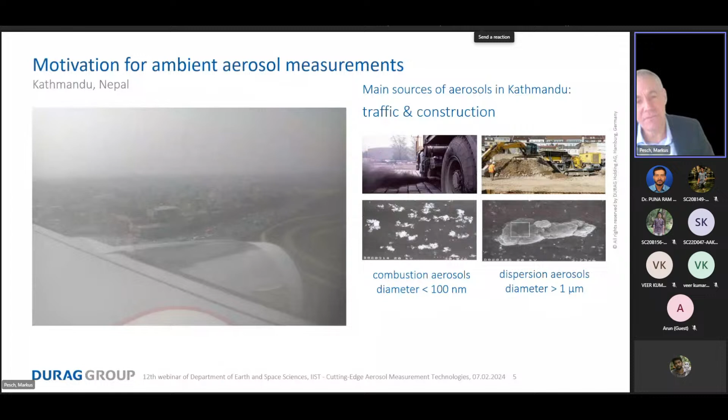On the next slide, you see Kathmandu, Nepal. That was also a flight close to the airport, and you see the sky is very similar to the sky of Beijing, but here the reason for aerosols was traffic and construction. And the interesting point when we are talking about airborne particles, aerosols, the size and the number of the aerosols gives really important information about the sources of the aerosols.

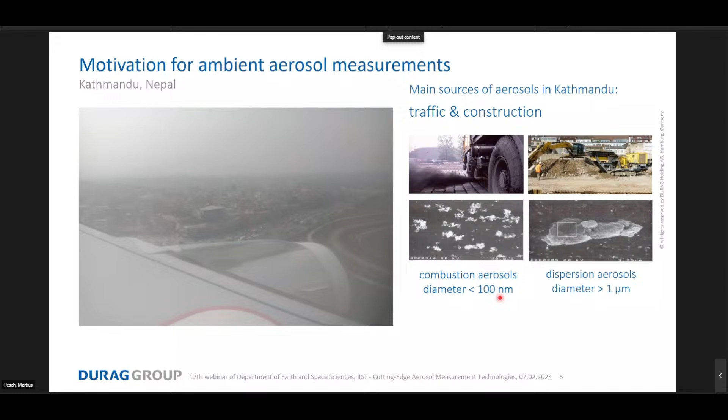If we have combustion aerosols, for example from a diesel engine, you have very, very small primary particles. They agglomerate to some clusters, and you see the diameter is less than 100 nanometers. Nanometers are 10⁻⁹ meters, so very small. The size of your hair, for example, is 80 micrometers. So nanometers are a very small metric. You see the combustion aerosols are very small.

Then you have construction. Here on the right picture, you see construction. Construction aerosols are mechanically produced aerosols. These aerosols are most often much larger. You see here a typical picture of a dispersion aerosol, and here you see the diameter is a couple of decades higher than the combustion aerosols. So the aerosol size and the aerosol number give you important information about the source, about the reason of the high pollution level.

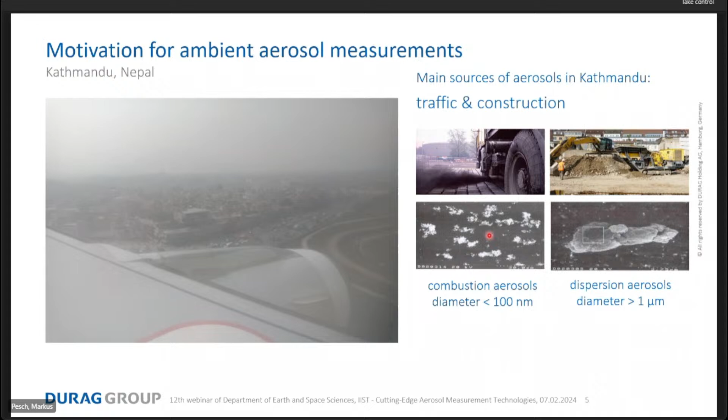When you compare, for example, the 800 micrograms per cubic meter in Beijing, and I know that in India there are many cities with similar concentrations, you see what is really the recommendation of the World Health Organization. The recommendation of the World Health Organization for an annual value for PM10 is 15. For a daily value, 45. Why are these values so small? Because there's not a limit or a value where you can say particles are not harmful anymore. So we have to reduce the particles, the aerosols in the atmosphere, to a minimum.

And I know that even the global background of aerosols is today higher than, for example, 5 micrograms for PM2.5. But of course, the World Health Organization publishes values that should be the goal, the objective for all clean air strategies. So motivation for aerosol measurements: we need precise aerosol measurements in the environment. We have to look, of course, for limit value exceedances, but we want also to identify the high levels.

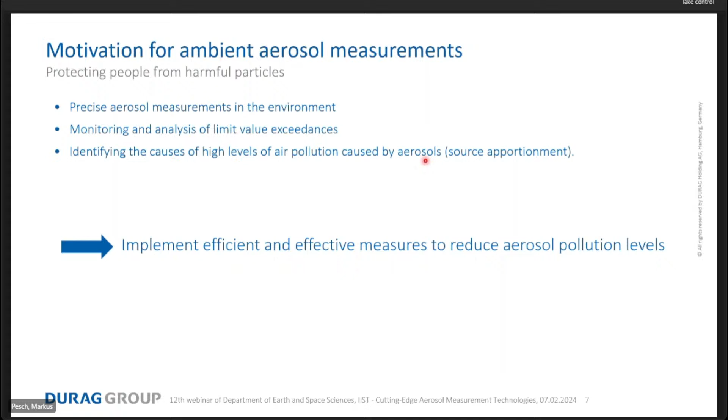Let us assume you have a clean air strategy for Delhi. In that clean air strategy, you have, of course, first to identify the main contributors to the pollution. Is it the traffic? Is it construction? Is it maybe also yellow sand? Or is it a natural aerosol? So to find efficient and effective measures, we have to determine the aerosols very, very precisely.

Yellow sand we would measure in that size range between 2 and 5 micrometers. In that size range, we call it the accumulation mode. Many small particles agglomerate, coagulate, and then we have larger diameters that are determining the mass. So the question is, okay, we want to reduce the pollution level. All limit values today are mass-based, micrograms per cubic meter. But meanwhile, we have more and more activities to measure also the number of aerosols, the size of aerosols.

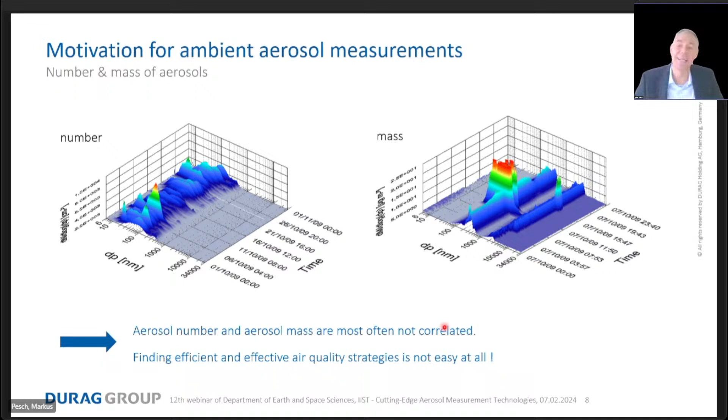And the World Health Organization recommended for the first time in 2021 also to measure, to count the ultrafine particles. Therefore, I want also to present in my talk today cutting-edge instruments to measure really small ultrafine particles. Aerosol measurement technologies. Before I start to give you an overview about aerosol measurement technologies, I want to clarify some aerosol definitions.

So aerosols means solid and liquid particles, not water. We do not want to measure water. That's very important because I can tell you water is one of the key factors that make aerosol measurements outside so difficult. You can assume if you have a foggy day, and what is really fog? What are the water droplets? And what is the solid or liquid particle, the aerosol? So foggy days are the most difficult days to determine aerosol concentration.

So water is always an issue. We do not want to measure water, and therefore we have very, very tricky drying systems to dry the aerosols before we are measuring them. And to that point, I come later. And instead of aerosol, most often the term particle is used. So we use both, even at GRIMM. Our name is GRIMM Aerosol Technology. We are a member of the Durag group, but many people say instead of aerosols, also particles.

Particulate matter is the English word for aerosols in the atmosphere, and that includes all particles. And I can tell you, when I studied environmental engineering in the mid-80s in Berlin, we were only talking about TSP. TSP means all particles, all suspended particles, droplets, liquids, in the size range from 1 nanometer, so the very, very small cluster particles formed most often from SO2 oxidized with hydroxyl radicals. I come to that later. So the very small particles are in the range of a nanometer. The very big particles, the big players, are in the range of 100 micrometer.

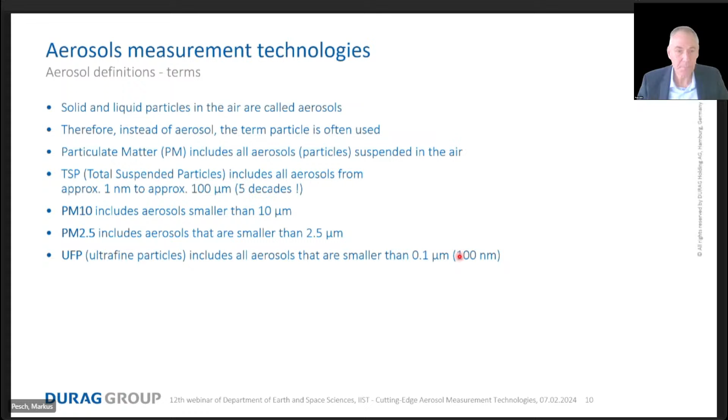And in that talk, I want to show you cutting-edge instruments to measure PM10 and PM2.5, but also instruments that are capable to measure the very small, the ultrafine particles. And the very challenging point when we are talking about aerosols, we have different sources. We have biological sources such as pollen, we have sand flow, yellow sand, a big issue from China, for example, and that sand is transported over long distances. We have volcanic eruptions where we have huge amounts of ash, but also of combustion aerosols to very high altitudes.

We have agriculture. Agriculture is very interesting because you have directly emitted aerosols. We call those aerosols primary aerosols. But as you may know, agriculture is a big source for ammonia, for gases, precursors of aerosols. And this ammonia, NH3, will be converted in the atmosphere to aerosols.

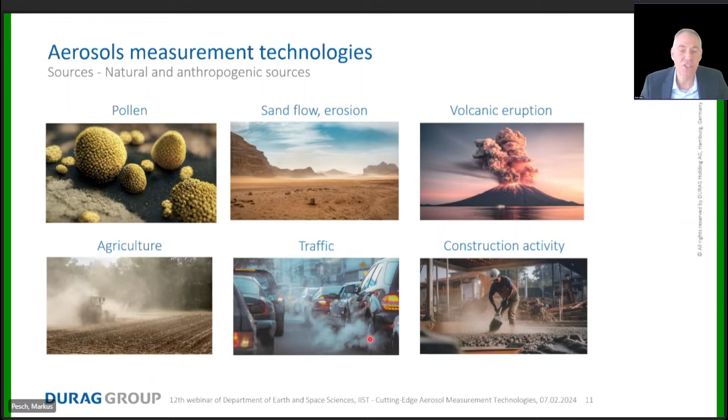Then we have traffic and we have construction. Construction, you learned, larger particles because it's a mechanical process. Traffic, combustion, condensation aerosols, very small. So we have different sources, and when I go further, we have also different sizes and colors.

An SO2 molecule, an ozone molecule, an ammonia molecule is always the same. But aerosols are totally different in color, in size, in shape. And that is the challenge for our measurement technology. We want to measure pollen, we want to measure ammonium sulfate, we want to measure mineral dust, we want to measure different aerosols, and the instruments should inform us about the mass, PM10, PM2.5, but also about the number, ultrafine particles, for example.

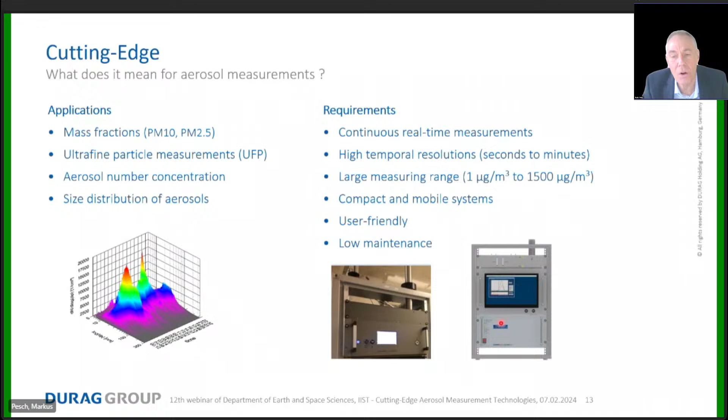So we are here talking about instruments in the range between, let us say, 15,000 and 25,000 euro. When we are measuring ultrafine particles, we go very quickly into the range of 40, 50 thousand, even higher prices. So the smaller the particles, the more complex the instrument, and most often the more expensive.

What does it mean, cutting-edge aerosol technologies? So cutting-edge aerosol technologies are based on light. We are measuring light. I was general manager of a LiDAR company, so we were developing LiDAR, light detection and ranging systems. And I can tell you, you can measure a single photon from the troposphere with a big telescope. So you can measure very sensitively. You can really measure single photons.

And what is a big advantage when we are measuring aerosols with light? We do not contact them. We do not change them. We have not any effect on the aerosol. And that is especially for aerosols very important, that you do not touch it, that you do not change the size, that you avoid agglomeration, diffusion losses, impaction losses, sedimentation losses. So light is very fast and sensitive.

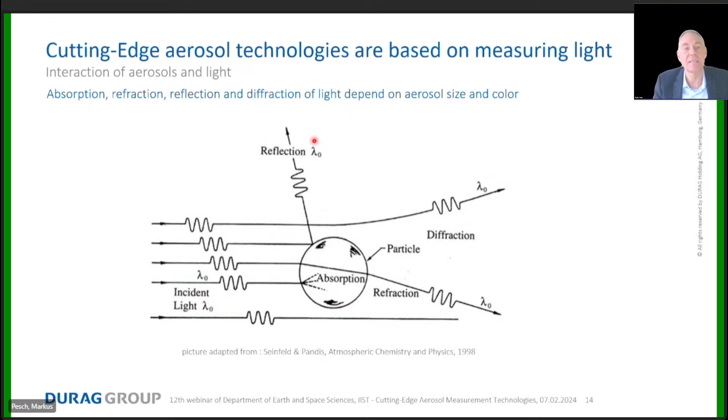You have, of course, different possibilities when you have light on an aerosol. What we are measuring is the scattered light, the reflection, the elastic scattering, where the wavelength is not changed. So the incident light and the reflected light have the same wavelengths. And the larger the particle, the stronger is the scattered light. That is the base of a cutting-edge aerosol technology.

When I talk about cutting-edge aerosol measurement technologies, I want to show you that we have, for all aerosols in the atmosphere, different types of measurement devices. The smallest aerosols are formed from SO2, OH radicals, ammonia, gases, precursors. They build very small clusters in the range of 1 nanometer. Here we have the so-called PSMPS. Then we have nucleation aerosols in the range between 10 and 100 nanometers. We can measure it with an SMPS plus CPC. And these two devices I will show you later.

And then we have coarse aerosols. In that range, we can measure with the optical aerosol spectrometer. And I will show you the latest development of my company, the EDM280, Environmental Dust Monitor 280, in that presentation.

Very important is you should never mix indoor instruments, this portable device, 11D, here's a sampling pipe, with outdoor measurement devices. An outdoor measurement device you can also use indoor, no problem. But when you go with an indoor instrument outside, you have strong influences of humidity. Most often you have a water surface on the aerosol. I explained that we do not want to measure water, so you should never use an indoor instrument for outdoor. For outdoor instruments, we have instruments where we are drying the sample before we are measuring it.

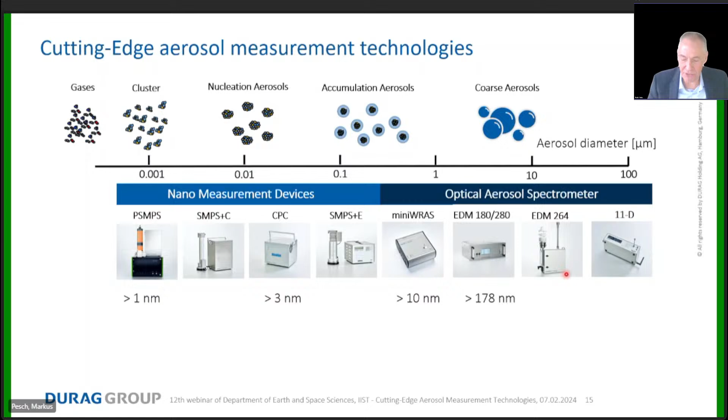When we are talking about aerosol spectrometers, we have different principles. There's an ISO guideline where you can look for more details. We have the optical focusing, where we hit with a laser, with a light, into the aerosol flow. And then you have a certain part of the aerosol flow that you analyze. The advantage is you can adapt the volume depending on the aerosol concentration. The disadvantage is when you have only a small part of the full flow, you may have boundary effects where you do not really catch all particles in the correct size.

The other possibility, and that is used by Grimm, by my company, is aerodynamic focusing. We accelerate the aerosols with an orifice, and then we have a laser passing through the accelerated aerosols, and we measure all aerosols coming through that laser beam. We call that full flow analysis, and the big advantage is you measure each single particle, and therefore you can distinguish 0.1 microgram per cubic meter from 0. So the detection limit is outstanding.

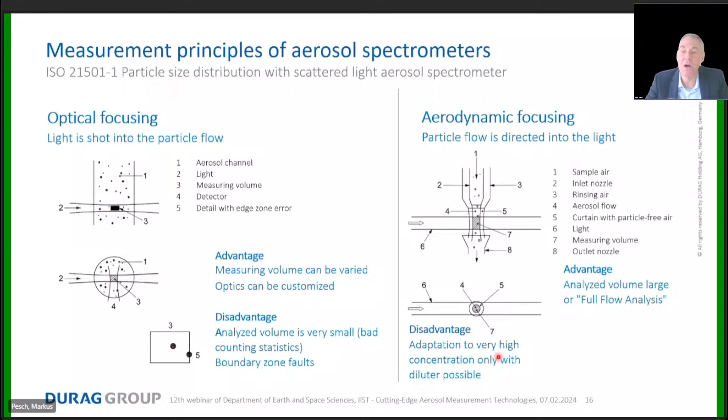The disadvantage could be that you cannot adapt it to higher concentrations. You would need a diluter, but our instruments are capable, as I mentioned, of measuring very low concentrations up to milligrams per cubic meter. So in the atmosphere, you do not have any problems. You do not have to dilute. You can measure with the aerosol spectrometer all sizes and concentrations.

Now I come to the latest development of my company. It's the EDM280. EDM means Environmental Dust Monitor. It's the latest development, and you see here we measure PM10, PM4, PM2.5, PM1, TSP, total suspended particulates, in 32 size channels.

And we start from 178 nanometer to 29.4 micrometer. So we cover a broad range of aerosols. Of course, the main interest of the EDM280 is measuring PM10 and PM2.5. Why? Because they are limit values. The precursors, the 180, we have sold roughly 3,000 instruments worldwide. They are running all over the world. The EDM280 is the latest development.

And what is very important when you're measuring aerosols, you have to suck them in very precisely. Then you dry the aerosols, most often by heating. So the EDM280 uses a heating concept to dry the aerosols, to evaporate the water, and then the aerosols are directly straight ahead here in the optical cell of the instrument. Of course, all ambient measurement technologies are equipped with a meteo sensor, wind speed, wind field, meteo data as temperature, pressure, to combine it with the aerosol measurements.

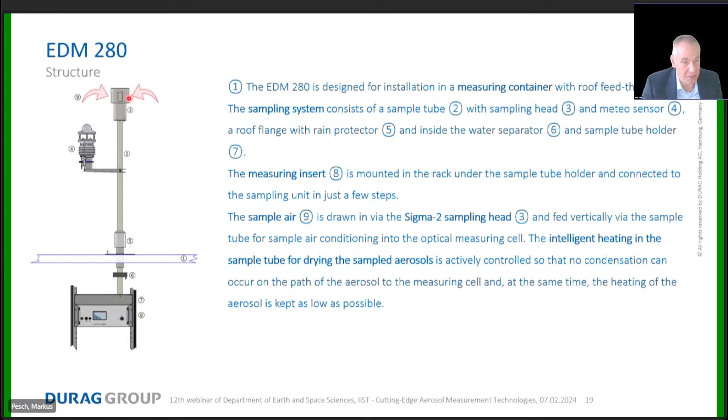Why using such a sigma-2 head? Yeah, this sigma-2 head has the capability that even if there's a high wind speed, the constant wind speed is reduced to a minimum here because of the geometry, and then we suck the aerosols representatively into the instrument with only 1.2 liter a minute.

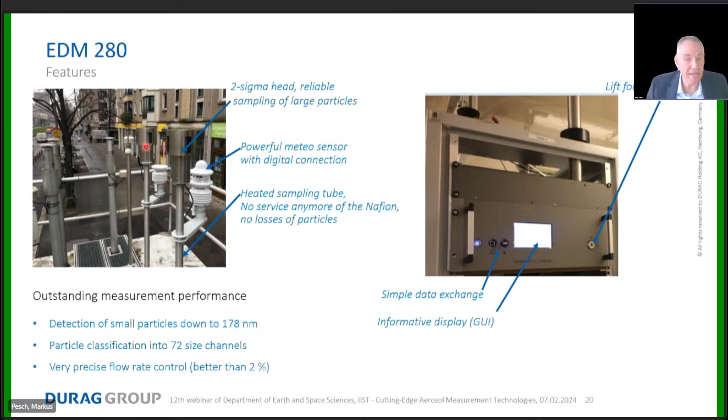And now all aerosol measurement devices are only as good as the analytical engine, let us say. The analytical engine of an aerosol spectrometer is, of course, the optical cell. So the optical cell is the motor, is the engine of every device. And in that cell, we spent more than 30 years of development. It looks easy, but it is not easy, I can tell you.

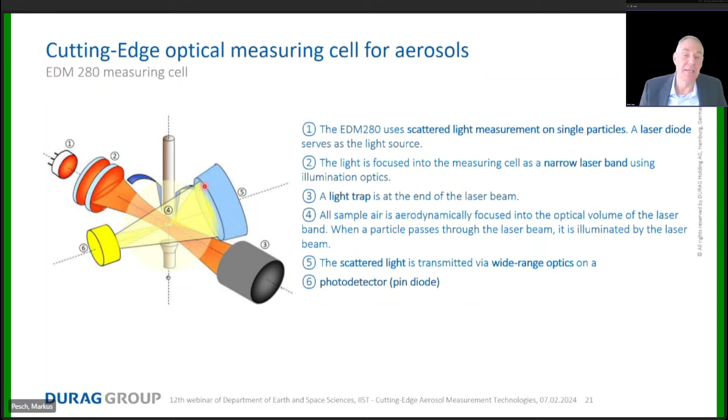So this optical cell measures in real time, in 1 second, all aerosols. It's a full flow analysis coming through that laser curtain. What you also see here is the so-called rinsing air. This rinsing air avoids contamination of the optics with dust. You can imagine when you are measuring aerosols, the main issue could be that the optical cell can be contaminated, so you often have to clean it, and therefore we are using a rinsing air for continuous cleaning of the optics.

Ultrafine particles. Ultrafine particles are so small that you cannot measure them directly. You have to use a physical behavior of particles, and that you can see on a clear sky when you have a jet flying and there's a huge water concentration in the atmosphere. You see the condensation stripes. And that is the same effect we are using to measure UFP, ultrafine particles. We call it a condensation particle counter.

So we condense a vapor around the particles, and then the particles grow, and then we can measure the particles optically. So the aerosol with the small particles goes through that wick, and that wick is heated to 36 degrees. We have butanol. Butanol is a very nice reagent to condense on aerosols. Then the aerosols with the saturated butanol vapor go into the condenser. Here it is cooled from 36 to 10 degrees. And then the particle is like a coin growing around the condensed butanol.

And from the very small particles, you have huge droplets, and then you can count them with the laser beam, as I explained, with the same optics. We call it a condensation particle counter. There's meanwhile a European standard, a CEN, that is well defining what is really the counting efficiency behavior. There are also devices on the market that are working with water. The advantage when we are using butanol, an alcohol, is that all aerosols, independent of the chemical composition, are growing and captured here with a laser beam.

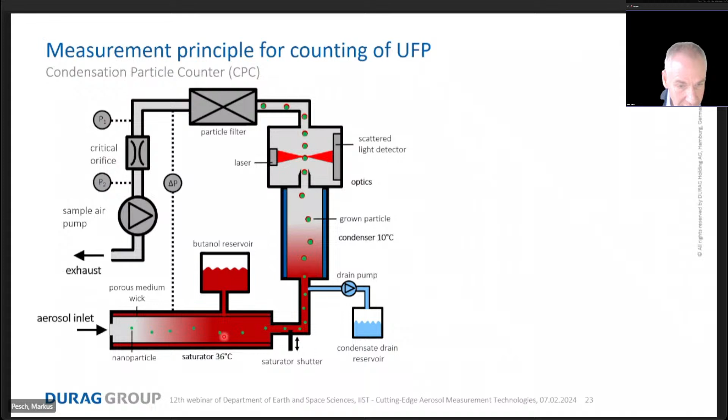This gives us the information about the number, but of course we are losing the information about the size when we are letting them grow by the condensation process. Therefore, we have the so-called scanning mobility particle sizer. What does that mean? We have very small aerosols. Because we are interested here in only the small ones, we have an impactor to extract the larger aerosols.

Then we neutralize the aerosols. Neutralize means we bring the aerosols in a very well-defined equilibrium charging state by using ions that we are generating. And when the aerosol is carrying a couple of ions on the surface, it has an electrical field behavior. So the aerosol goes in here, then we have the so-called DMA.

And by changing the high voltage in that DMA, we are changing the flight path of the aerosols, and only, as marked here in green, only a certain size of aerosols comes out as a sample flow. Then we have only one size, and then these aerosols are measured with a CPC or Faraday cup electrometer.

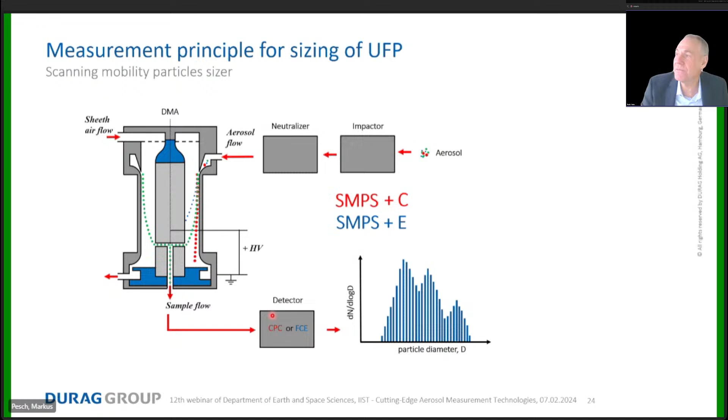And by stepping, by changing the voltage, we have different sizes extracted from the instrument, and then we can decrypt them. It looks a little bit tricky, but I can tell you all measurement devices for sizing aerosols are meanwhile based on that principle. The cutting edge issue is, of course, to make it as robust and maintenance free as possible, to use it for 24/7 measurement.

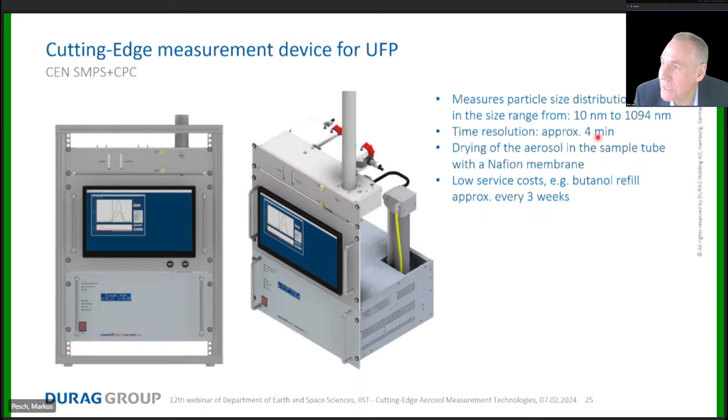This is a device that we are offering to the market. This is very brand new. It's an SMPS with CPC. You see all is 19-inch, and you can install it in a small container. And you see it captures the size from 10 nanometers to roughly 1 micrometer. So a broad range of very, very small particles. The time resolution is 4 minutes. Why is the time resolution a couple of minutes? Because we are scanning, we are changing the voltage step by step.

Now I come, of course, to a very important issue. I always say grey is theory, what really counts is on the field. So what is really the measurement performance? And when I want to talk about cutting edge aerosol technologies, the measurement performance should be outstanding. Otherwise, it's not cutting edge. And we have in Germany the trend that the PM10 concentration is strongly decreasing. You see here 1995.

I was working on my PhD, by the way, at that time about tropospheric ozone.

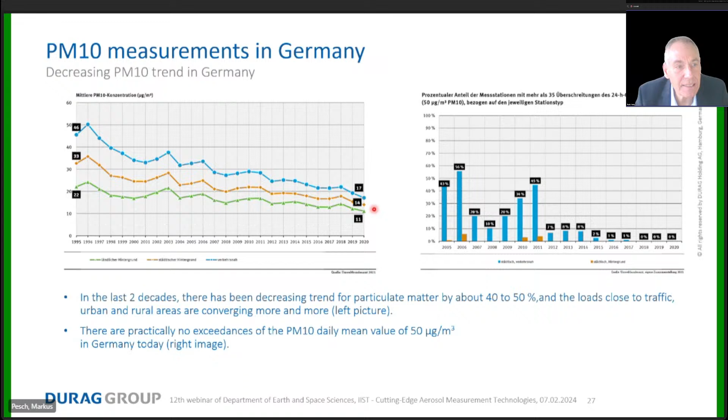And then the concentration was very strongly decreasing. There's only a couple of micrograms per cubic meter. And the difference between urban background and street is not as high. So we need an instrument that is really capable of measuring that low concentration. That is done by optical methods. So the decreasing trend of aerosols is very good for all optical measurement methods, not only for ours, because an optical measurement device can measure very, very small concentrations.

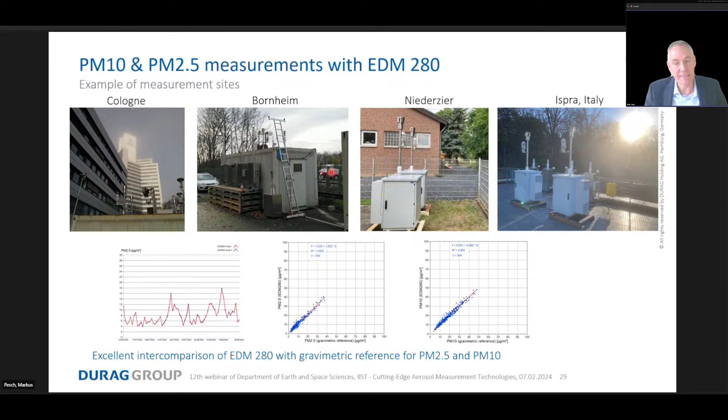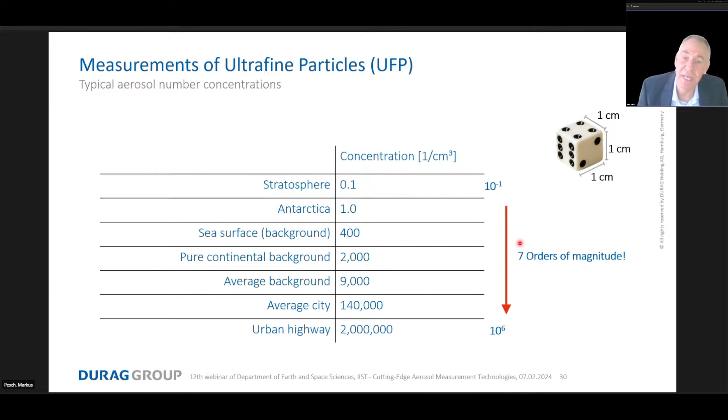And when you measure directly at the urban highway, you can have up to 2 million particles in such a small volume. And as I mentioned, these very small particles go directly deep into the lungs, into the blood. So the harmful effect of ultrafine particles is extremely high. And therefore, the World Health Organization recommended to measure ultrafine particles.

I don't know if you have visited our very famous Berlin Zoo. It's one of the most famous in the world. And directly in front of the zoo, you see a typical measurement container with our device here on the roof. And that device is measuring ultrafine particles with a high time resolution. And when you see on a Monday, because here are buses and diesel cars and taxis, you have a huge increase of concentration counts in the morning in the rush hour.

Interesting is when you look for a Sunday, you see during the night we have a very low concentration. And then in the evening here, concentration increases because here are many pubs and discos and many young people are using their car or the bus or the taxi to go there to the center of Berlin. So on a Sunday, during the day, the concentration is not high, but then in the evening, when the private activities increase, you see high concentration of ultrafine particles up to 140,000 particles per cubic centimeter.

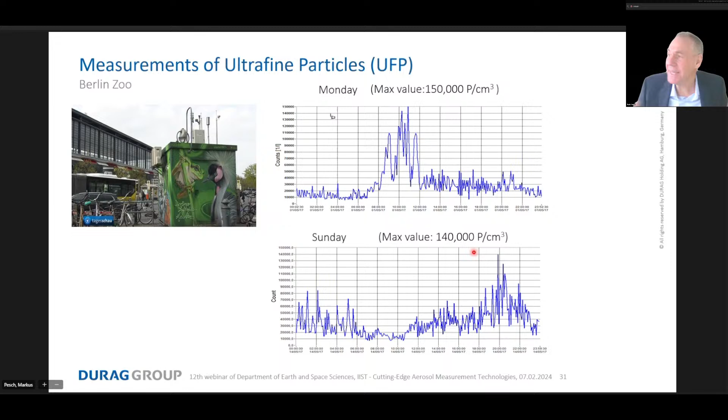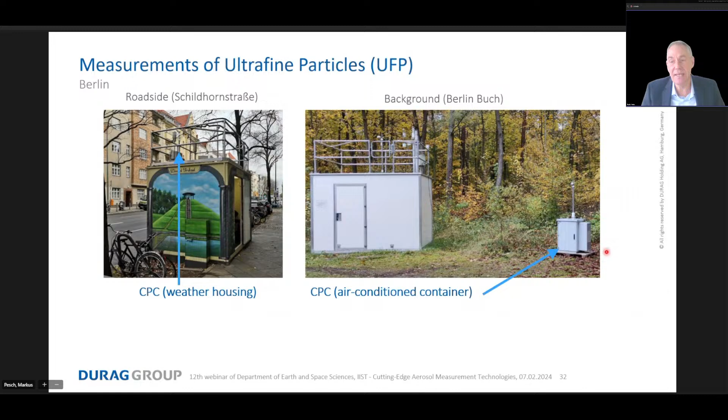Cutting edge means the instrument should be flexible. You should easily install the instrument on the roof, as here, for example, on a typical shelter, but it should also be very flexible so that you have a small air-conditioned container where you can also install the instrument. That is here, for example, in the urban background of Berlin, a very green area. You see here the typical measurement container of the Berlin network and our instrument. That was a measurement campaign we carried out with the Berlin network to measure ultrafine particles. So all is installed in that small container. You just need electricity.

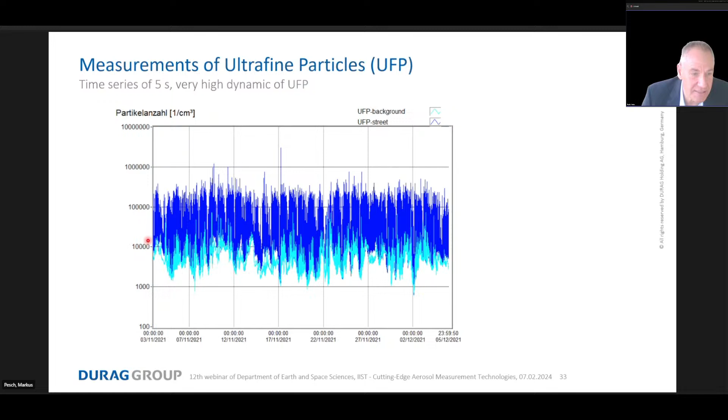And I show you some results of ultrafine particles. When we are talking about ultrafine particles, the very small particles, we have a huge difference. That is a logarithmic scale, and that is time, and the data series I condensed to 5 seconds. The instrument can measure even in 1 second. So the background concentration is in a couple of thousands, and the highest concentration near the street, the deep blue, we have here concentrations over 1 million particles per cubic centimeter, so a huge concentration. So when we are measuring ultrafine particles, we need a high time resolution to really see the events.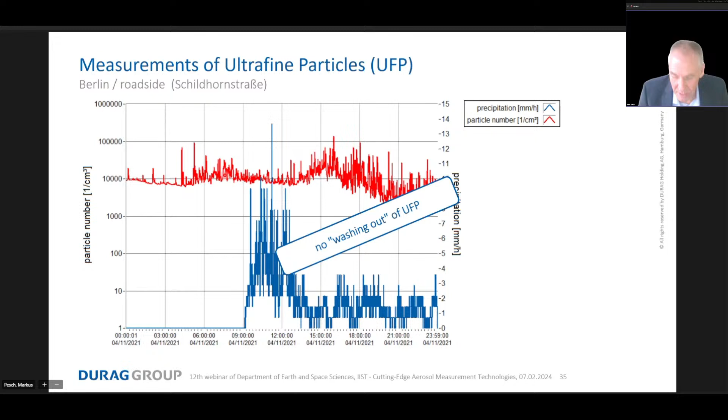For the very small particles, the UFP, that is here the red time series, you don't see such a behavior. Here's the same day. We have the rain, the blue, it starts to rain, but the concentration stays relatively stable. So the ultrafine particles are not cleaned out, are not washed out after rainfall, and the concentration stays quite stable in the atmosphere. That was my last slide.